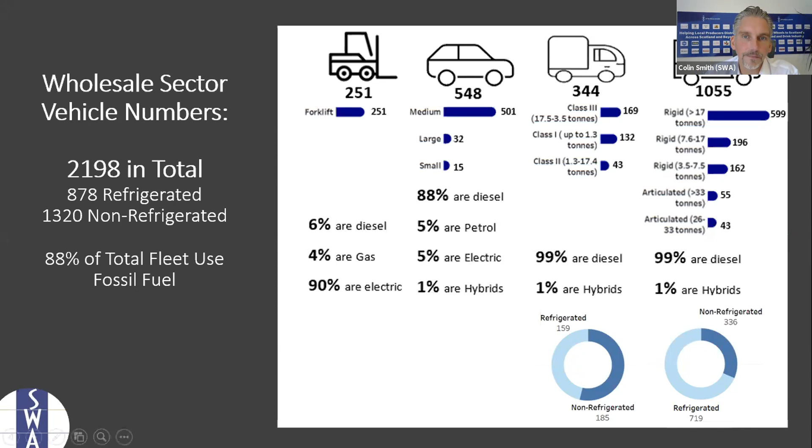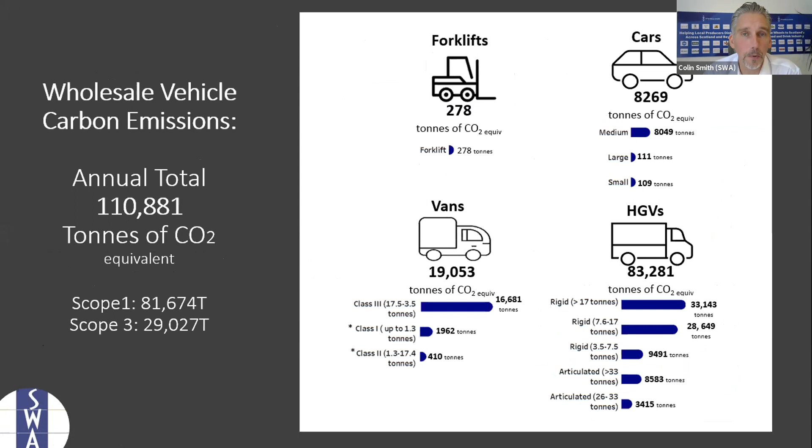If we now actually look at our carbon footprint, our sector emits the equivalent of nearly 111,000 tonnes of CO2 per year. For the techies, the figure is a combination of Scope 1 and Scope 3 emissions. For those that haven't asked how it's calculated, there will be more explanation in the report when it comes out. I think this graph highlights better the highest vehicle pollutants.

75% of all our emissions come from our HGVs, with the rigids alone making up 56% of all emissions. That can be seen in the first four bars on the left-hand side, where 3 of them are the rigids. Interesting that they make up 56%, but actually they only represent 36% of the total number in our fleet.

Meanwhile, a further 11% of our carbon footprint is from our articulated vehicles, which represented 9% of our HGVs, but actually only represented 4.5% of the total number in our fleet. Therefore, evidence suggests that they are the largest polluter by individual vehicle.

It's also interesting that only 7% of our emissions come from cars, despite them representing 25% of the total number of fleet. However, unlike cars, where 5% of our sector is already electric, there's currently no electric solutions for those larger vehicles. So it's clear that the biggest opportunity in decarbonising our industry is also our biggest challenge.

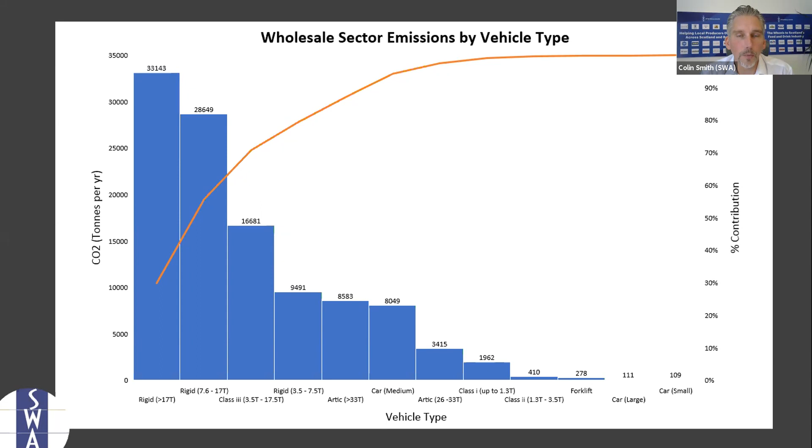And how do we decarbonise those large vehicles? When it comes to looking at a roadmap, please, this is provisional, this is not for sharing because we've not finalised this yet. When it looks at the roadmap to net zero, it is difficult to quantify because it is very much dependent on the development of new technology that we're here to talk about today, and the required infrastructure needed to support this.

Within our report, we have analysed and made recommendations on the different ways in which members can start to reduce their fleet emissions as of today and going forward as technology develops. These include increasing operational efficiencies, such as driver training and fuel management, through to looking at the pros and cons of potentially using transitional options such as HVO, LNG, or liquid gas, biogas, and dual fuel.

Making change today and moving to electric vehicles in our cars and smaller vehicles by 2030 could help the sector achieve a 15 to 20% reduction in emissions by that time. However, as HGV replacement and development timelines stand today, it's probably not likely that we'll achieve much more than a 36% reduction by 2035, and only thereafter will hydrogen and electric fuel cells have become much more commercially available.

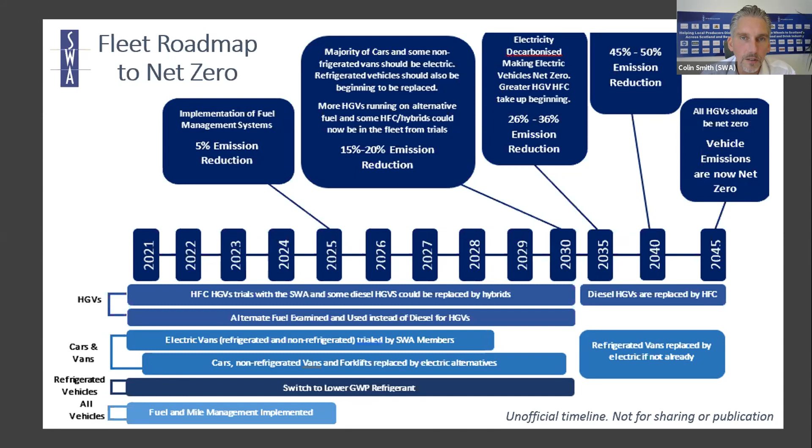But it's not just about looking at the technology development, it's also about looking at the barriers preventing people or businesses from the take-up, encouraging them and incentivizing them to adapt to those new technologies. So we did survey what the barriers were.

Of no surprise, cost and lack of financial support to incentivize change were cited as top barriers. It's no surprise, especially when our sector is working on 1.3% net margins, and that's something that we will always be telling governments and their agencies when we're speaking to them.

So this report that we've produced, along with the support of the people here today, will try and unlock those sort of financial incentives through Scottish Government and UK Government. There is huge investment currently going into hydrogen development, and we believe that unless incentives or subsidies are provided to those early adopters, change will not take place, and certainly not at the scale required to reach Scottish Government net zero targets by 2045.

So on that note, I'm actually going to pass now over to Barry Carruthers, and we'll start and see where change is happening and how you can get involved.

Thank you very much, Colin. It'll probably take me 16 minutes to get my slides to share, to be honest, but I'll give you a very quick rundown of what we're going to cover, because it will be quick from our side, because I suspect actually this is the boring bit, and that we hope to take care of all these issues behind the scenes. So if you want to switch off the next 10 minutes, this is the bit you want to miss, because actually Ben and Fiona and Amanda are going to do interesting bits later.

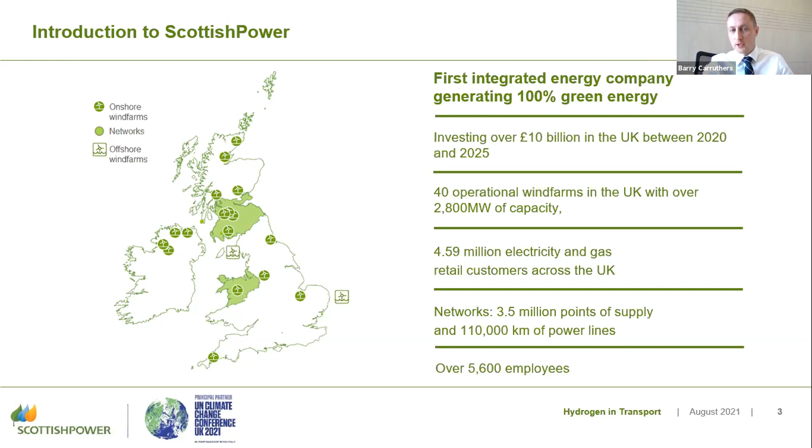And of course, there's areas of the country, as you see here, shaded in green, where we actually operate the network as well. Now, you'll hear us talk a lot about, obviously, Scottish Power, UK and Ireland, and certainly a Scottish focus. But for anyone that's thinking about international aspects, whenever you think Scottish Power, for us, Iberdrola is interchangeable with Scottish Power as a name, because even though we have lots of friends and colleagues based in Madrid, we're actually operating in all these different countries across the world, and actually a lot of them not on the map as well.

So it does open up things like port infrastructure. How do we get goods across the water, across ferries? That's something that we're doing in a joined up fashion as well.

Now, we made a strategic choice to really get into this last year, because hopefully it does make a lot of logical sense, actually, that if you're producing renewable electrons, we think that that will only get you 80 to 90% of decarbonisation. That extra 10, 20% of the economy really does need hydrogen to help. It needs a molecule rather than an electron. So that's why we know we have the right basis to build upon.

And a few example projects to flag up to you very quickly, but only to highlight this one in particular, south of Glasgow, because it's the first major one that we've put into planning, and therefore it's accelerated beyond other ones. So if you know the Whitelee wind farm, just south of Glasgow, it's 539 megawatts of wind power. So it's UK's largest and arguably Europe's largest.

There's always a wind farm in Romania that claims to be bigger, but I don't think anyone's gone round and counted the number of turbines. So we'll still claim that. But the point is, that's existing wind energy. We're looking to build new solar, and we're looking to put up to 20 megawatts of hydrogen production there.

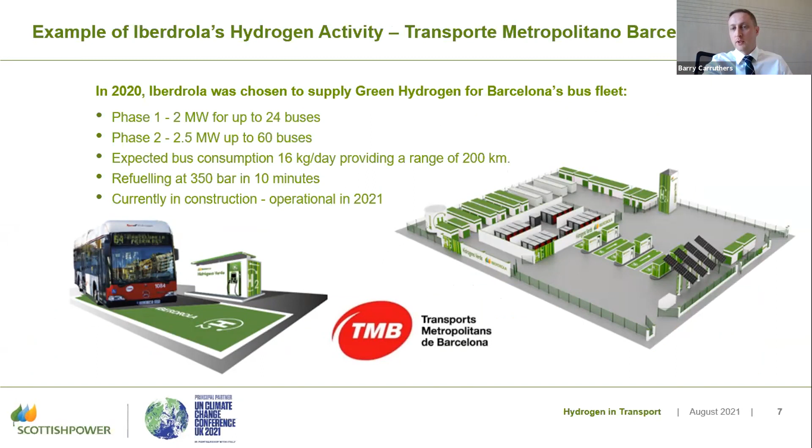Other things that we're doing across the group, and the same engineering team, I should say, we share all knowledge internally across Scottish Power, Iberdrola. We're doing bus refueling projects, for example, in Barcelona as well. So all these things are starting to really move at a pace across the different countries.

Now, I talked earlier about the 80, 90% electrification, and our CEO famously in the past said electrify the hell out of everything. Now that is true, and we stick by that. But for all the things that we know, at certain times you need a molecule.

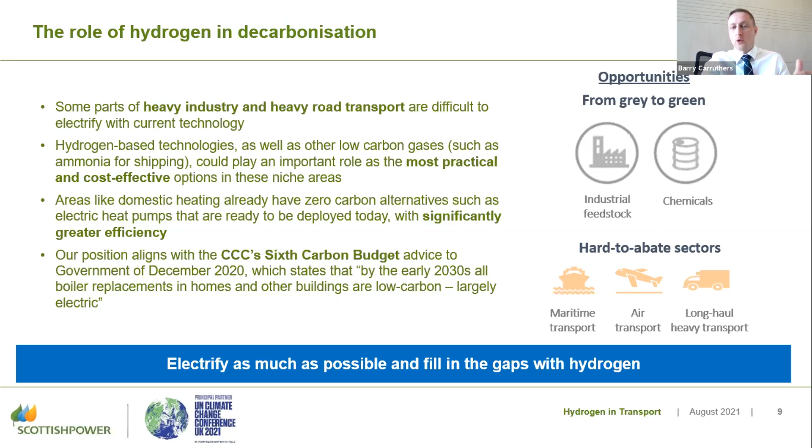Now, it feels like certainly the heavier end of road transport is where that plays out. Of course, trains, shipping, aviation, but also just industry, manufacturing, all the heavier end. Now, it's important that those things also exist, because the more we build out at scale for all these different companies and all these different customers, reduces everybody's costs. So it's a good thing that hydrogen has more uses, because then we get greater economies of scale. As I say, the unit price can come down.

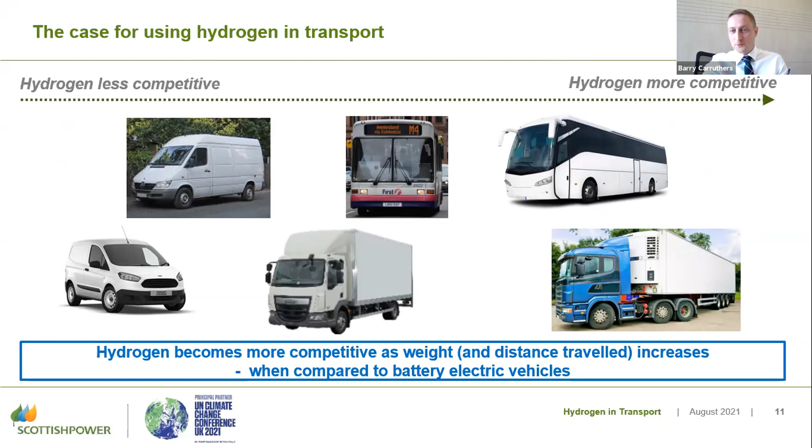At this point, I've got a colleague on the call, Andy Goodwin, our head of economics and markets. I'm going to pass to him in a minute about the really complicated stuff. I know you already know all this, and Ben and Amanda will cover it too, so we won't dwell on it. Andy, do you want to cover this section about total cost of ownership models?

Yeah, I can do briefly, Barry. The idea of the next couple of slides is to show there's a consensus view that the cost of using battery electric vehicles or fuel cell could be roughly the same, and that's what's shown in this study, both at 2020 and in 2050.

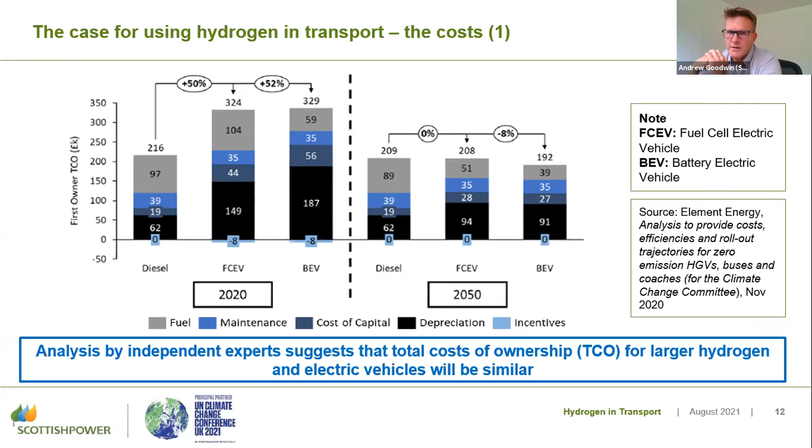On the next slide, Barry has got another similar study, a European study. Don't worry about the numbers too much, but the idea is just to show it's an equivalent overall cost of battery electric and hydrogen.

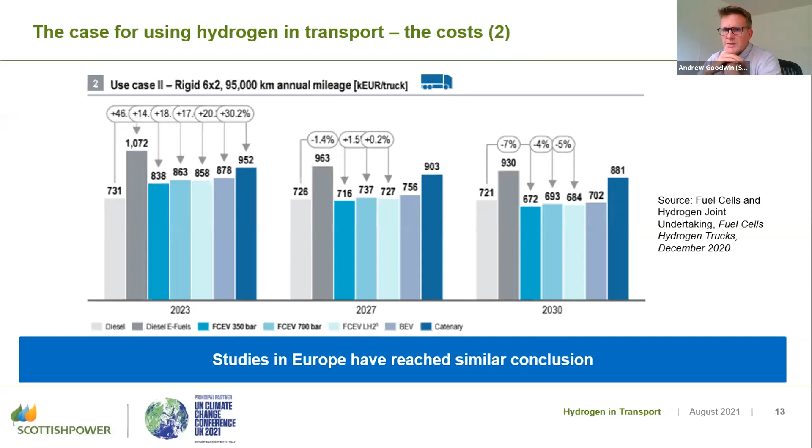So the idea then, on the next slide, people can look at those in their own time, but if the efficiency and the costs are similar, there are then practical benefits of using hydrogen which push it ahead of battery electric only.

In many ways, a lot of these relate to how similar it is to the model that many people have with diesel trucks at the moment. The range is similar, it's similar refueling times, and compared to battery electric, the vehicles are lighter. The site itself is also similar operationally - you don't need as much room for the refueling infrastructure as you would with battery electric charging infrastructure.

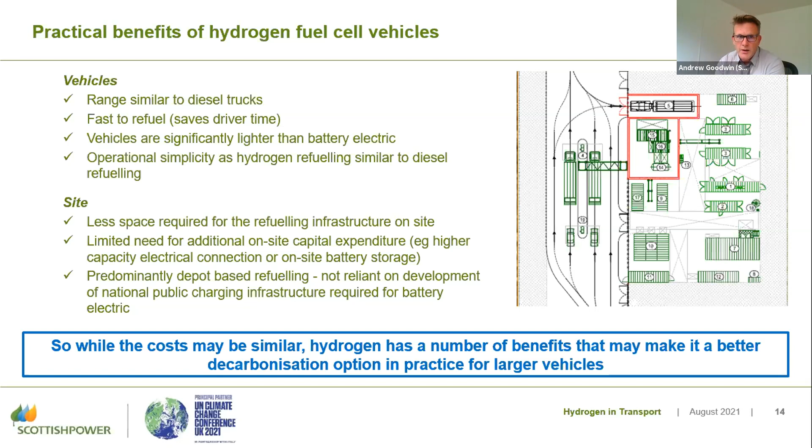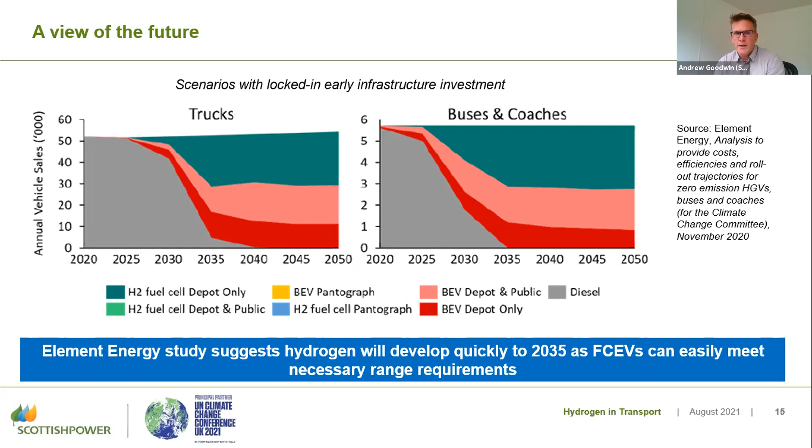This is a view of how Element Energy sees it going into the future in one particular scenario, so it's relatively balanced - you get battery electric and hydrogen, but in this case, particularly for hydrogen fuel cell at depots, it provides about 50% of the solution, if you like.

So, the economics. Before we get into that, these are our different options for how you configure hydrogen and how it relates to the customer. Option one is where you have the electrolyzer, the hydrogen production facility, on the same site as the customer or hydrogen refueling station, and you bring electricity in through the grid from the renewable asset - so this is all 100% renewable electricity driving the hydrogen production, but that's off-site.

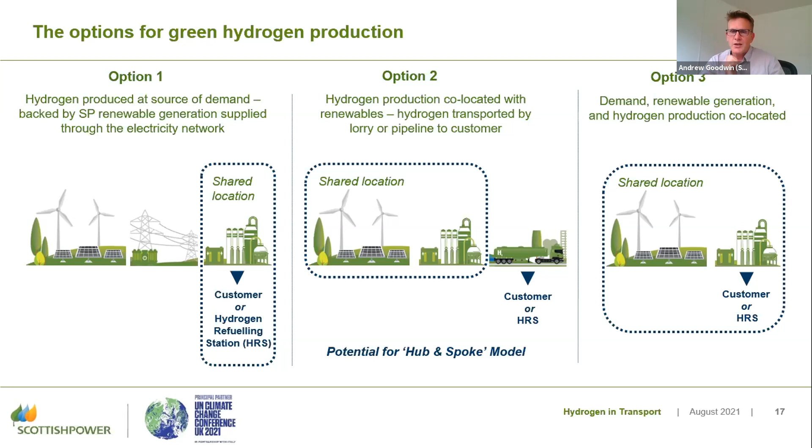Option two is where you have the electrolyzer co-located with the renewable electricity, and then you transport it - could be by tube trailer or pipeline - to the customer or refueling point. The third option is where all three are together: renewables, customer, and electrolyzer all on one site. In that case, you're cutting out all your transport costs and electricity distribution costs.

In terms of costs, on the right-hand side a Bloomberg study shows it could be €3 to €7 per kilo at the moment, with potential to go down to between €2 and €3 per kilo by 2030. The things really driving that down are renewable costs coming down - in the last 10 years, the cost of offshore wind, for example, has come down by more than half, and that will continue in the next 10 years and beyond.

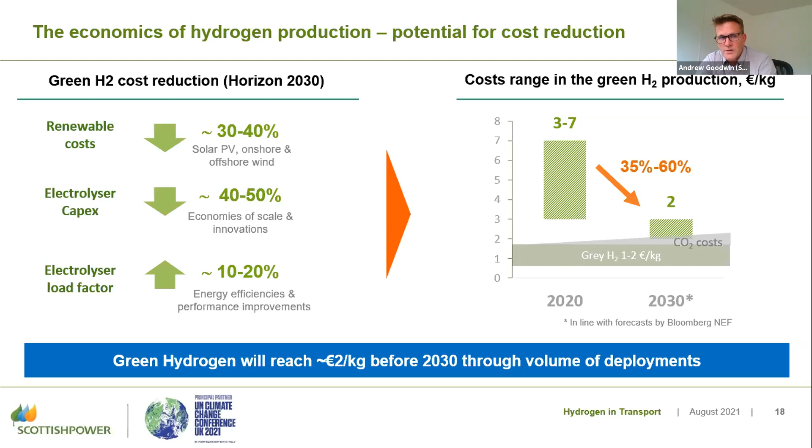That cost reduction will reduce the price of hydrogen. The electrolyzer capex, as more gets deployed, the cost will come down with technology innovations, and the efficiency of electrolyzers will also improve, further reducing costs. We see the cost of green hydrogen coming down to around €2 a kilo by around 2030 because of that volume of hydrogen production deployment.

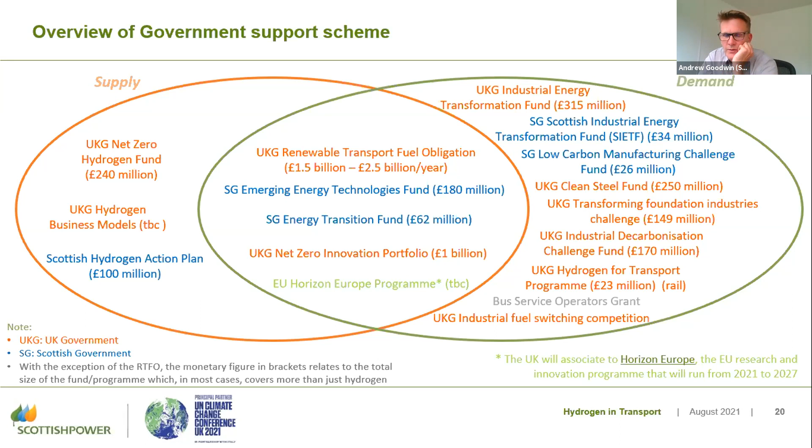If we move on from that, these I think are the key ones for the transport sector. So the biggest one I think is the Renewable Transport Fuel Obligation, which was started about 12-13 years ago, but was extended in 2018 to include hydrogen as an eligible renewable fuel.

Out of the others, so the Scottish government, the UK government, Net Zero Hydrogen Fund and the hydrogen business models, all of those three rows at the bottom are aimed at supporting hydrogen production. So just to take the Net Zero Hydrogen Fund, for example, that's a commitment of 240 million to 2025. The UK government is consulting on that at the moment, and that's really to provide an upfront capex payment to make hydrogen production cheaper. And that's one that we're particularly focused on at the moment.

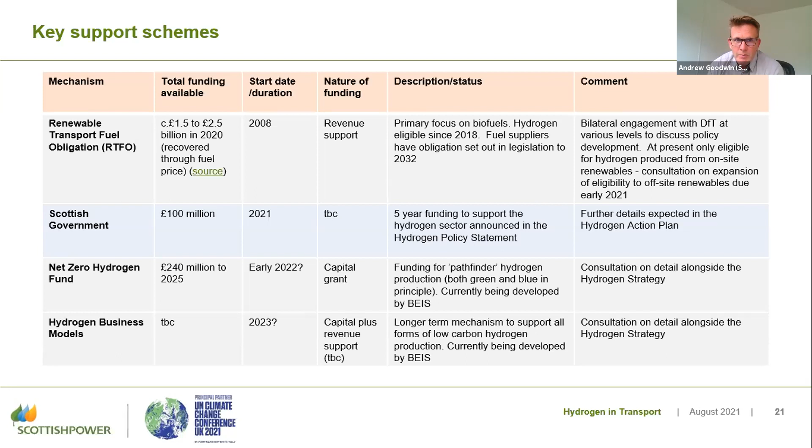But just to move on again, Barry, so the Renewable Transport Fuel Obligation, as I said, I think this is a really significant potential driver of moving to hydrogen. So very briefly, the RTFO is an obligation on fuel suppliers to supply a certain proportion of their fuel from renewable sources. So largely in the past, this has been around biofuels, but as I said, hydrogen was added as an eligible fuel in 2018.

And it actually gets double the reward of other forms of biofuel, for various reasons. When you're converting from a quantity to a kilogram of hydrogen, it means it gets 9 certificates, 9 RTFCs, Renewable Transport Fuel Certificates, for every kilogram that you produce, and that could give a value of around between £5 and £6 per kilo, which will bring down the cost of hydrogen to potentially around 3, which is at a level where we think it becomes competitive.

So with that, I'll hand back to you, Barry. Thanks, brilliant, thank you Andy.

And I guess on that previous slide, we've said nominally 60 pence against RTFCs. Now that's a variable, obviously, that could be much higher, could be 75, could be 80 pence, depends how you trade them over time. But to get the order of magnitude, it is worth about £5 to £6 per kilogram, and therefore it is really, really substantial to unlock some of these earlier projects.

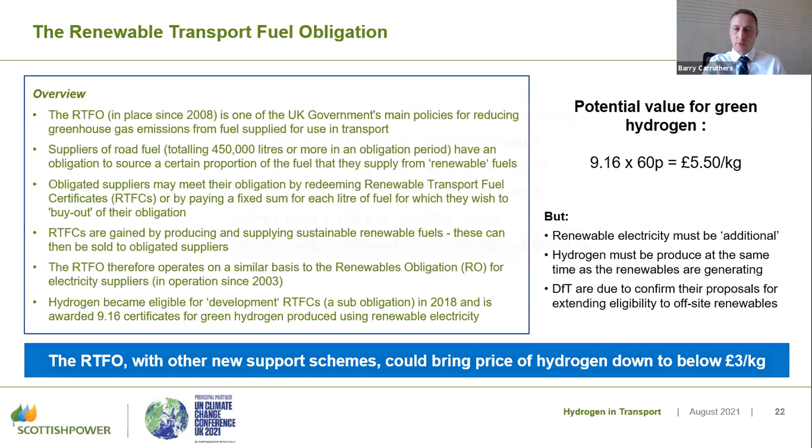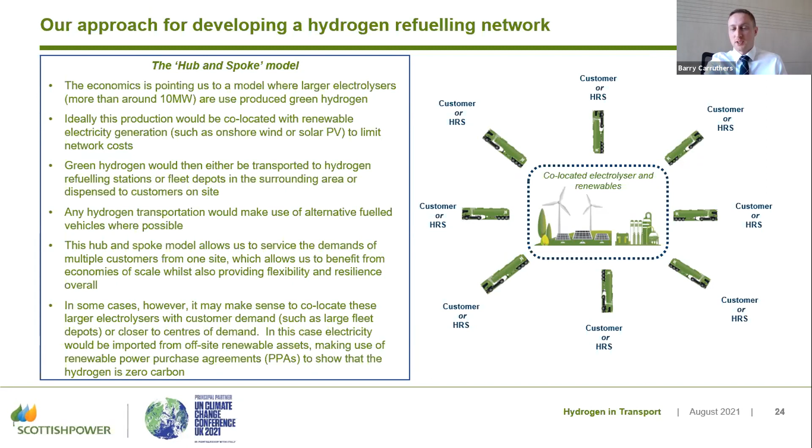And just to explain a wee bit what we mean about the kind of hub and spoke model that we've talked about - this is our job. Our job is to find out whether we should be making large volumes of hydrogen near a wind farm, near solar panels, at the top of a hill somewhere, and then using hydrogen driven tube trailers to deliver it to refueling sites. It's really hard to see large scale hydrogen production in an urban environment to refuel buses at a bus depot, for example. So we're going to have to try and make all these economics work for all of us.

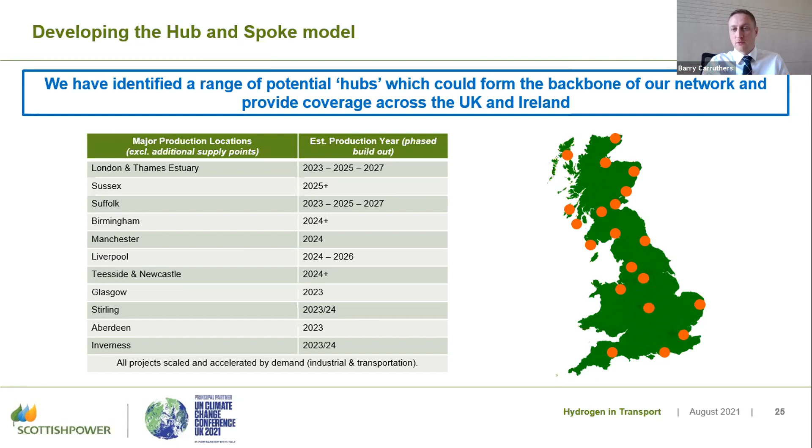But what we're trying to do is use that concept of hub and spoke to look at key strategic locations across UK and Ireland, both Northern and Republic of Ireland, so that we have things like port coverage, urban environments, major trunk roads. These are not the places that we would have refueling stations - those would be much smaller dots everywhere, but these would be big strategic centres of production, and that kind of brings the cost down, as Andy was explaining.

So really, for us, it's just an open offer to work with all of you, as we're already working with Amanda and Ben and Fiona, for example. I don't think any single player and any single stakeholder group can make this happen. It's going to have to be the whole ecosystem, and probably all the people on the call today, working together to figure out where is it needed, when is it needed, how much do you need, and try and bring a whole package together. And that's our kind of open invitation, to work collaboratively in that way.

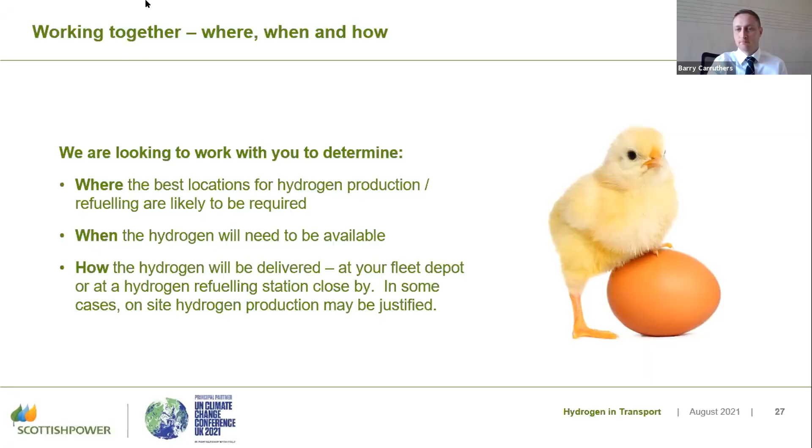Some people might be confused from the start of the first few slides, as I was slightly, as you were rushing through. But I guess all our members need to really know is what you want from them, what is it you need to know to enable the cost to come down, because that is a big issue.

One question I was going to ask, actually, because I know you're focusing at Whitelee, certainly it's all about green hydrogen production. UK government came out with their hydrogen strategy, and they were backing both horses, blue hydrogen and green hydrogen. What does that do for Whitelee and producers such as yourself, developing the hydrogen, where you really are focusing on green, but now potentially UK government certainly are backing blue as well?

I mean, great question. It's fairly logical, I think, where this has come from. As you can imagine, even when you think back to the days of the power sector and the evolution that's gone on, to see renewable technologies come to the fore and be incentivized, and now we would expect our electricity supply to be as clean as possible, as close to 100% renewable as possible, and that's the transition we're on as a country. So we shut down coal, we shut down gas, you reduce your reliance on fossil fuels, and you move to renewable technology. Now for us, in the hydrogen space, we're just going straight to that.

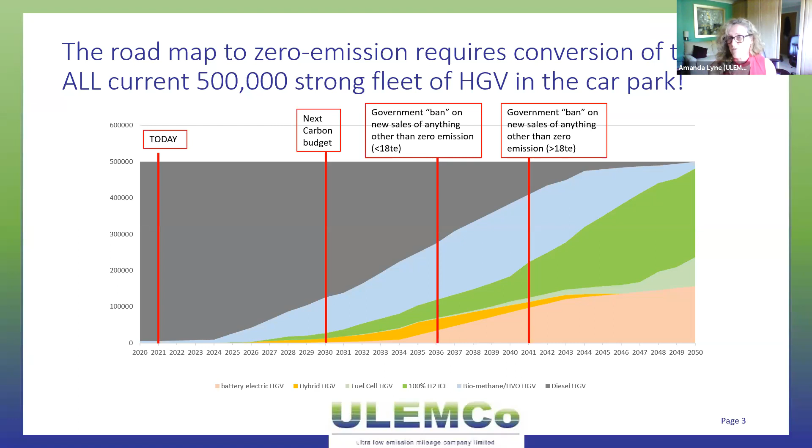What we need to do is provide demand for Barry to get on and make his investment. If you take the target we're talking about—and the slide in front of you is actually the UK figure, but Scotland has set a target to have 5 gigawatts of green hydrogen available by 2030—if you model how much hydrogen that actually means, it's in the order of about 400,000 tonnes. It could be a bit more or less depending on timing and productivity, the efficiency.

In any reckoning, by 2030, if all of that green hydrogen—remembering this is low hanging fruit, an area we know we can't decarbonise otherwise—would be between 15 to 20,000 vehicles. So if we deliver on the targets and what Barry is trying to do, we could use all of that green hydrogen into transport, 15 to 20,000 vehicles. We could add some buses into that too, but that's the opportunity for the investment Barry and Scottish Power are making.

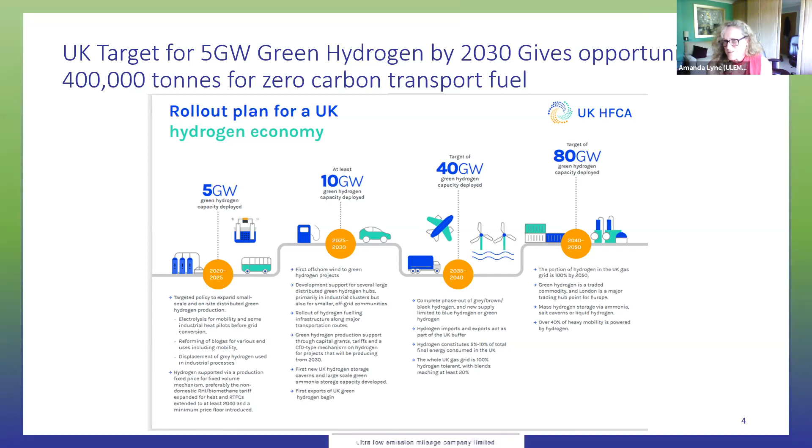I think, Colin, you said your members have about 2,000 vehicles, something like that. So in Scotland, we should have an ambition that all of that gigawatt goes to help us in decarbonising. That would accelerate your roadmap, Colin—accelerate getting more of those vehicles using hydrogen and decarbonising along the way. So there's a bit of an idea or vision of what might be possible.

So anyway, that's the scene. What is ULEMCo doing to try and help with that? Because we want to make sure hydrogen vehicles are available to customers to use, since we believe that in your sector, these are by far the best option for you to have normal operations, do your normal business.

We've heard from Barry, we can make a fuel competitively. We can give you a vehicle that mirrors mostly what you're used to doing with the diesel vehicle, so you won't have to radically change everything about your operation. So actually, that's what we're all trying to do—give you a vehicle that helps make that transition happen quicker.

In our portfolio at the moment, we have a technology that I'm going to talk to you a bit more about that enables you to do that even easier, where you can have your existing diesel vehicle—your existing decision making on Euro 6 purchased vehicles, new or existing—significantly reduce their carbon emissions and use some of Barry's hydrogen when he makes it available. For every kilogram of hydrogen you use, you'll be reducing your CO2 because it's green hydrogen in the process. That's our hydrogen dual fuel technology.

What that ultimately means is taking an existing vehicle and adding high pressure hydrogen tanks, similar to what would be on a fuel cell vehicle.

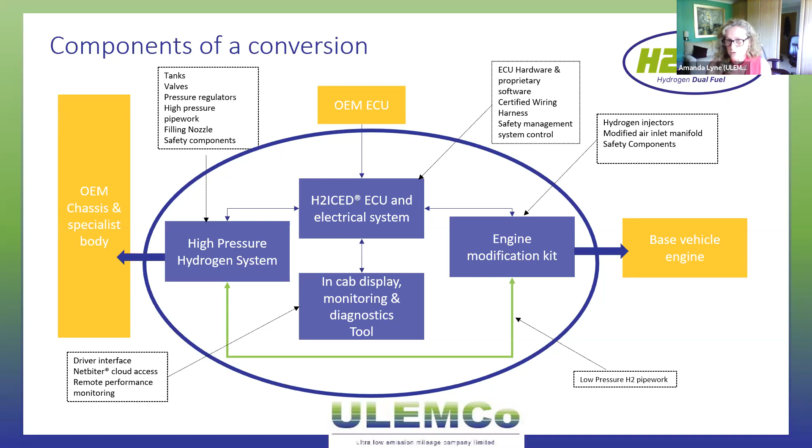If there's no hydrogen available, the vehicle will still operate as diesel, which is really important. As long as you use that bit of hydrogen, that's the proportion of CO2 you'll save, but you'll still be able to do the operation. Ultimately, you are able to carry on doing what you normally do, coping with the fact that we're building infrastructure to support that. We don't have it today, but we will have it sometime in the future, and it's growing.

We do other technologies. We do have available commercially today a fuel cell based technology that could provide range extension to electric vehicles, but the limit on the availability of electric vehicles is the limit on what we could do with the fuel cell technology. Longer term, we're also doing work on 100% zero emission versions, because the dual fuel technology always has a proportion of diesel in the mix, so it's not zero emission, but it does significantly reduce the emissions. We're doing R&D on 100% hydrogen combustion and future fuel cell technology integration as well.

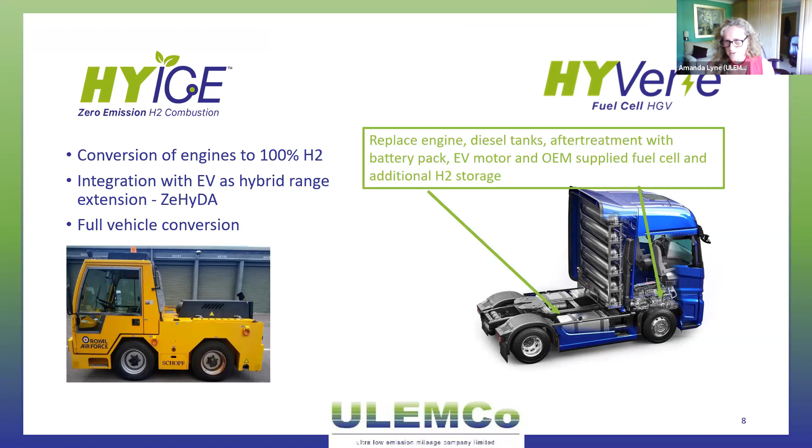So given all of that, why would somebody need to change, and why do they need to change now? As your own research has shown, Colin, the flip side of some of what are the barriers are also some of the reasons why you really need to get on and do this now.

Most importantly, if I buy a diesel vehicle today, I need to make an assumption about what its value is going to be at the end of life. Some people, 3 to 5 years, okay, they could probably accept that it's still going to be worth the same. But if you're going to own that vehicle for any longer than that, I wouldn't bet that my current assumptions on that asset value are the same as what they've historically been, because there's all sorts of alternatives that will come. What's the resale value of that vehicle? I don't know. You can't make the same assumptions. The world of the future shouldn't be made on assuming what we've historically had.

The reality is your customers, Colin, your members' customers, will be looking for lower carbon solutions. Another message about that accelerated target is the fact that large corporates and the people we're dealing with are not waiting for the government target, but are actually setting targets that are far further in front of what the political targets are. And that's a really good thing, it says we're embracing it. But the reality is, if we can offer a solution that's giving lower carbon than the guy next door to me, then there's a competitive advantage to doing that.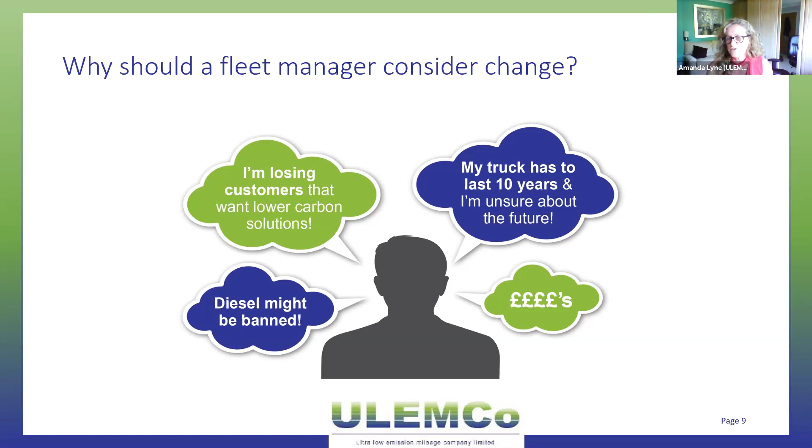Based on some work we've done with a number of our customers, if we could do a fleet-wide conversion of, I don't know, 100 urban trucks, your rigids, Colin, in your members' portfolio, converted to dual fuel using Barry's green hydrogen, would save 2,600 tons or so - I don't know the exact calculation - but a lot of CO2 in the here and now based on a reduction.

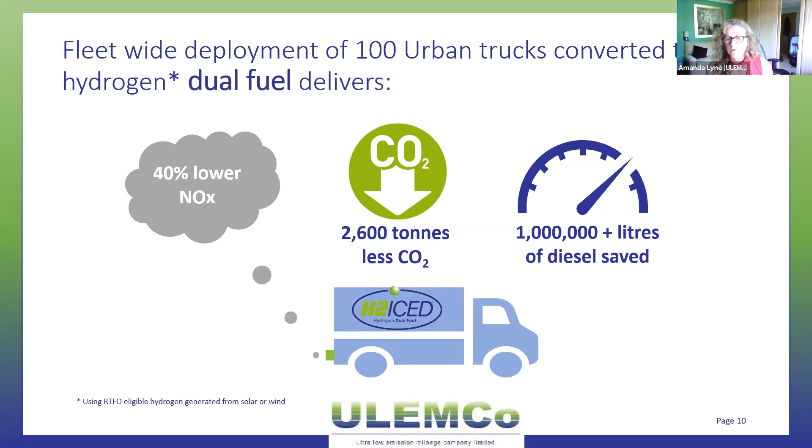The good thing is also, given the duty cycle of an urban truck, if we're putting dual fuel in, we also provide some air quality benefit as well. So we're assuming that you're fitting the technology to a modern Euro 6 diesel vehicle, because we want to make sure the air quality emissions are good too, but we can have the CO2 saving on top of that.

That just puts into context where we are today, not necessarily where we'll be in the future. But if we can do fleet-wide conversion now, using conventional technology available to us, that also helps build the infrastructure, and helps us get to the point where fuel cell vehicles are competitive, or 100% hydrogen vehicles will be competitive. We're also doing a really good thing as well.

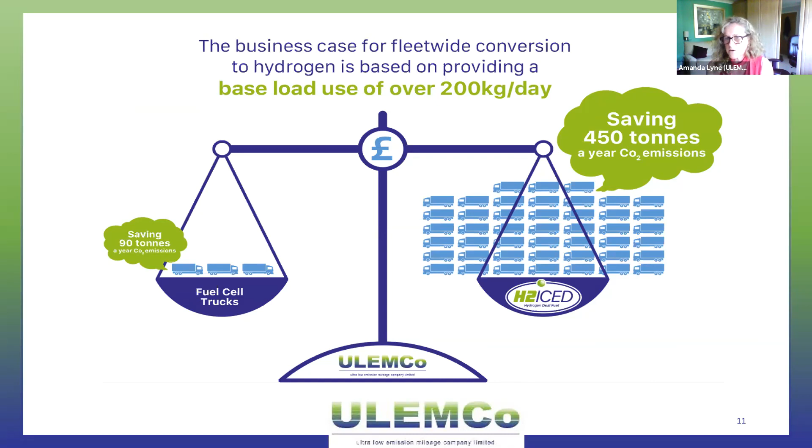We will save many hundreds of tons of CO2 by converting a vehicle today to run on hydrogen dual fuel, and that money is spent wisely, providing a better option for the moment, based on the fact that the alternatives - and actually that's true for electric too - are all more expensive. So we will be spending a little bit more money, we are adding some cost onto the vehicle, but we're getting all of that saving at the same time.

That's the message that lots of customers across the UK have been trialling, no distraction. The customers in Scotland, particularly around Aberdeen, where they've had hydrogen infrastructure for a long time, complement their bus portfolio with HGV fleets so that they can get the volume needed to be located in one place to make it all make sense.

Just to talk about some opportunity on the Artic, and I know that the Artic in this particular instance is less important for your members, Colin, because the greater proportion are in that rigid, but there are solutions where we can also reduce CO2 emissions using green hydrogen on Artics. Those will use 10 kilos a day on a 200-mile type round trip journey, and for every kilogram of hydrogen they're using, they're displacing diesel and not emitting CO2 into the atmosphere.

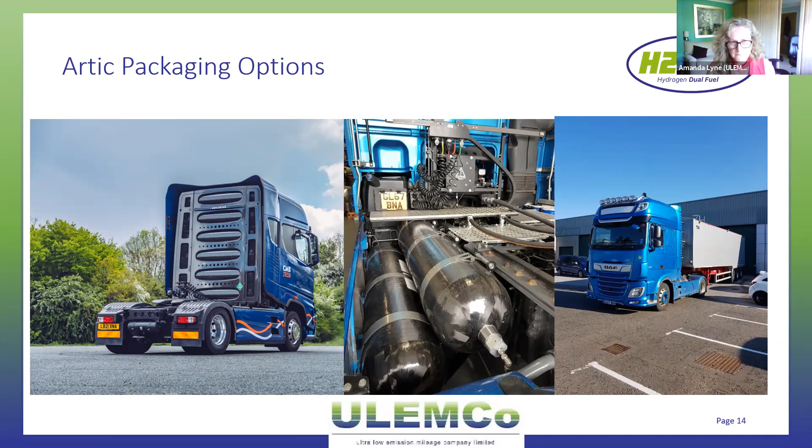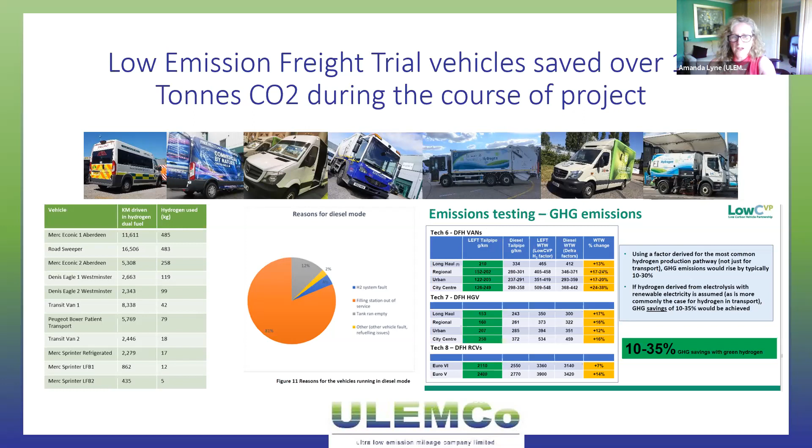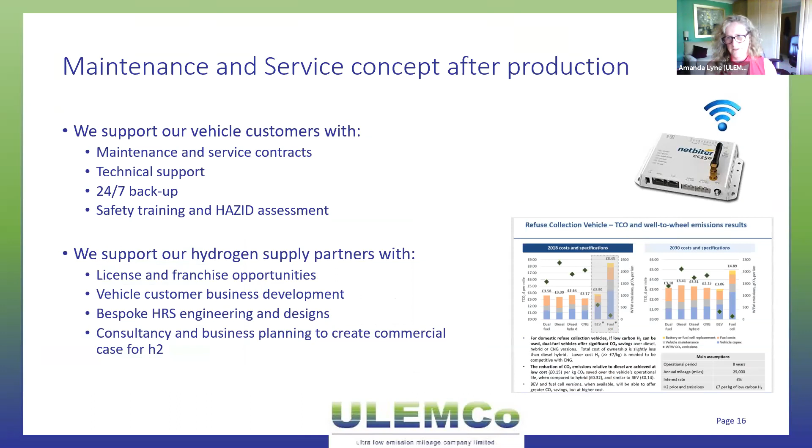Just to show, if your members, Colin, are interested, we can share real world data that shows what's possible with the range of types of vehicles we can do, from vans right through to Artics. And as a company, we're here and able to provide all the standard maintenance and services needed for the conventional vehicle. As it happens, the hydrogen system doesn't require any extra maintenance, but we can also help make sure that safety and all the other things are taken into account with practical experience.

Similarly, Barry quite rightly talks about us collaborating together, but every single hydrogen station in the UK has had some of our vehicles working out of it. So we have quite a lot of experience of what we need from a filling station, what we need from a hydrogen supply, what you need to do in a depot to make sure you have a safe setup and can meet the safety requirements, and we can help customers think through that process directly.

Basically, in summary, our focus and plan is to work with companies like Barry who are keen to create the demand, crack that chicken and egg part, and provide a solution that will enable locations using between 300 and 500 kilos a day. In our case, on an Artic, that would be about 30 Artics based around a location providing a base load.

A refuse truck probably only uses 5 kilos a day. Your rigids delivering more locally would probably be similar to that, Colin—using anywhere between 5 and 10 kilos a day, depending on the mileage. So that sets the context for the kind of number of vehicles you'll want around a location to make a sensible, usable business model.

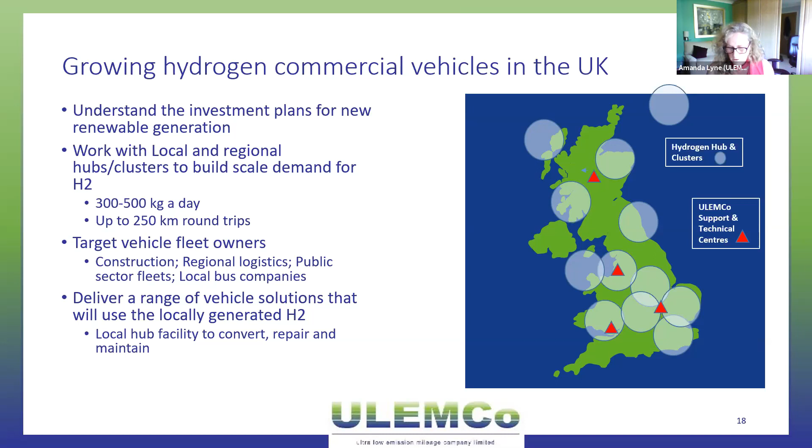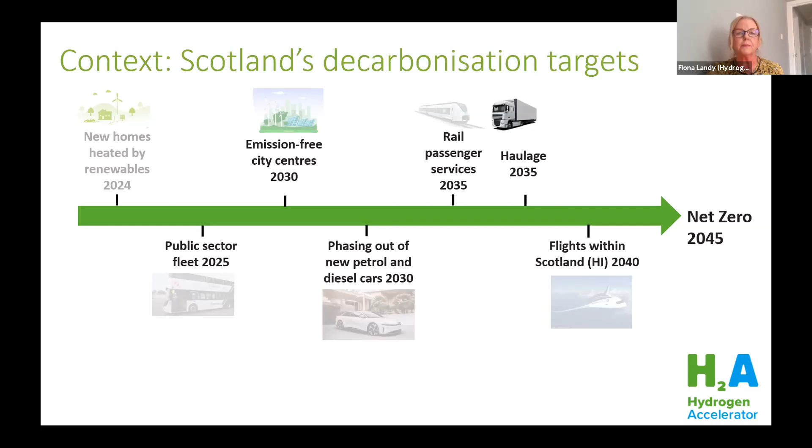With the refuelling infrastructure, we've done a lot of novel projects in the past which has served us really well, and we've got lessons learned from those, but now it really is that scaling up opportunity. There's one thing about the hydrogen sector - it's all about collaboration. This is a snapshot of a few of the projects.

My background - I've been in the sector for 11 years. I'm from Aberdeen City Council originally, and then I moved to Scottish Cities Alliance, where I led on a programme, a European programme, which was about kickstarting the hydrogen economy across 7 cities. This was about commercialisation of hydrogen fuel cell buses and also the hydrogen refuelling infrastructure.

So 2 cities went forward at the time, Dundee and Aberdeen. Aberdeen has deployed 15 double-deck buses, and we're putting in another 10, and Dundee will be deploying 12 buses in the next year or so.

The actual refuelling infrastructure will be placed at Michelin Scotland Innovation Park, which was the Michelin tyre factory, which many of you will know was decommissioned about 1.5 years ago. It's now positioned as the centre for sustainable mobility for Scotland, again trying to retain those jobs and bring about that innovation. So us in St Andrews work very closely with MSIP about bringing together a skills academy there as well, and really bringing all that manufacturing together.

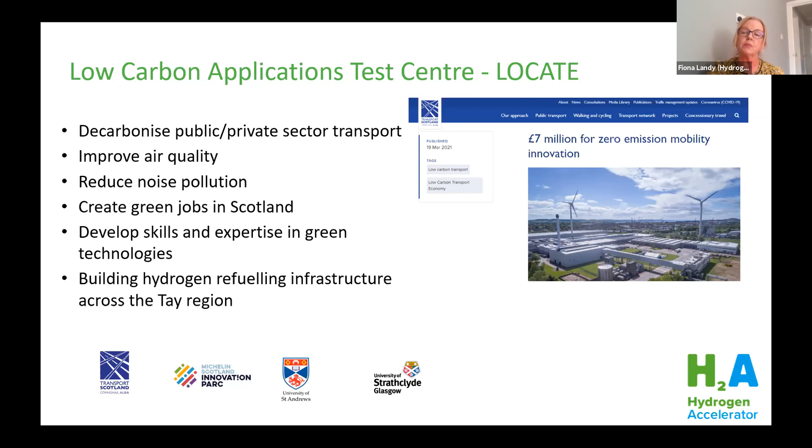I'll let Ben speak in a minute about all those green jobs that we are trying to set up at this particular facility. Part of that facility is about having a powertrain test centre set up there for all the innovative technologies of the future.

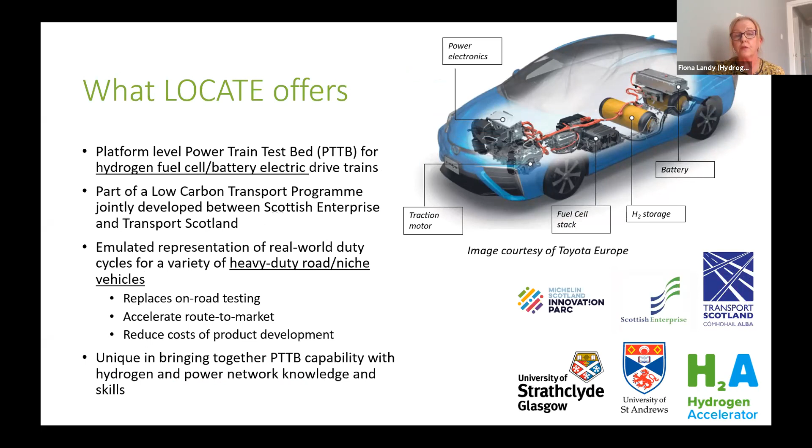So it's off-road testing for powertrains. We were awarded 7 million from the Scottish Government to set that facility up, working with Strathclyde as a partner and MSIP in bringing that programme together, which will come into fruition in the first quarter of 2023.

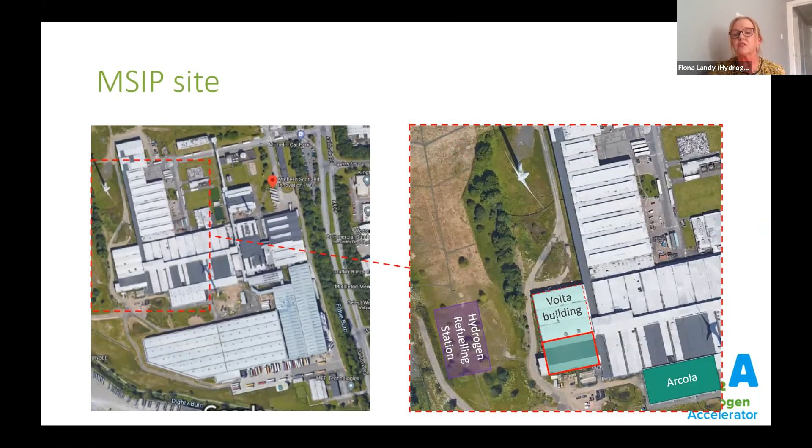I continue to work with all the 7 cities, and I've been supporting Glasgow with their fleet strategy and decarbonisation over the next 10 years, which they want to reduce to 5 years. So very much around looking at their heavy fleet vehicles, which they've put the stake in the ground that they want to all be fuel cell electric.

We raised some funding through Transport Scotland for a prototype refuse collection vehicle that Arcola Energy, in partnership with Farid Hillend, produced, which they'll have demonstrated at COP, and that's led on to another fleet. I'll let Ben talk more about that, and again, as Amanda said, around the dual fuel gritters as well. So it's a really effective way of making that step change into heavy fleet vehicles and really driving forward the decarbonisation of Glasgow, which is a very big captive fleet to decarbonise.

So they're completely changing the way they use their vehicles - they're double shifting now, moving into the fuel cell department. So the potential for having hydrogen refueling infrastructure - the tender process is out at the moment.

This is the Polmadie site, the big GREC energy-from-waste plant in Glasgow. That surrounds a number of organisations such as Transport Scotland Roads, First Bus just down the road, and also Alstom. So this is all about clustering - really looking at where you position that hydrogen refueling infrastructure to maximise the opportunities for what public and private sector organisations are located in that region, to really maximise the scale and get the economics to stack up.

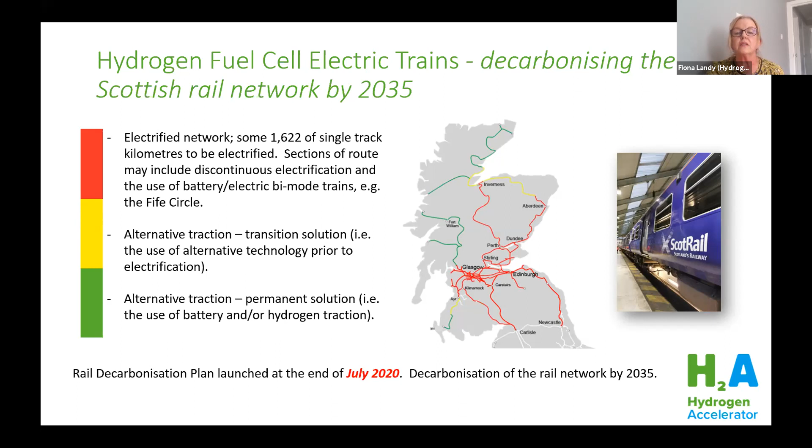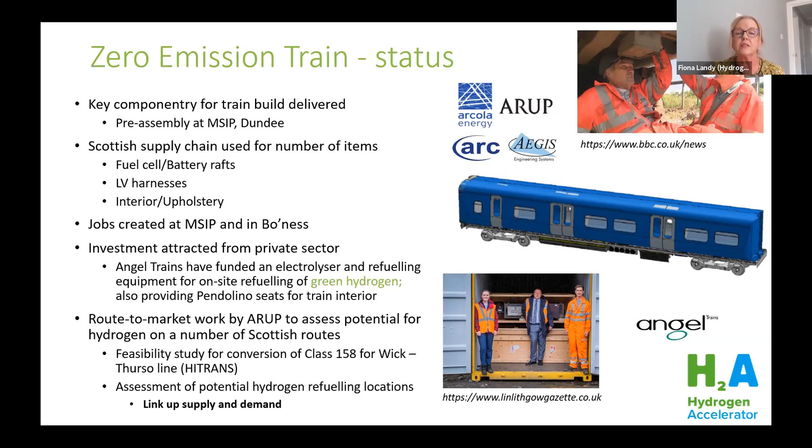So really looking right across the sector coupling of different transport modes, we can come together to start that decarbonisation programme. The St Andrews Hydrogen Accelerator led on this project - we procured this train, a redundant train for ScotRail, and Arcola Energy in partnership with Arup, Arc, and Aegis, and thanks to Angel as well, provided funding for temporary fuel infrastructure. They're converting this class 314 train, which will be demonstrated at COP26 this year. That's Minister Dey there, who's been to the site and is really impressed with the train, and very excited about the opportunity for decarbonisation of the train sector in Scotland.

And I'll just finish here on the SHIFT programme. The Hydrogen Accelerator is really excited about supporting this programme, looking right across different sectors such as timber, food and drink, and utilities, to really start to support another sector making that transition into the hydrogen and fuel cell technology sector. Now I'll hand over to Ben to continue on about the technologies. Thank you.

Hopefully I just managed to successfully wrestle control of the presentation. I think you got it. Can I move? See if I can. Yes, I can move the presentation.

Afternoon, folks. I'm Ben Todd, CEO of Arcola Energy. I'm going to talk about fuel cells and hydrogen vehicles, give you a bit of technology overview of hydrogen fuel cell options, and then talk about the SHIFT project. There's some quite dense slides at the end on SHIFT that are intended for sharing later, so the deck will be available, and you can all read about how to engage in SHIFT.

So start off then. I get the deck to move. Yeah, okay.

So, Arcola Energy. We're a leading UK specialist in hydrogen and fuel cell integration, focused on zero emission heavy duty vehicles. We've built and integrated fuel cells in everything from 1 watt toys up to designs for multi-megawatt power generation systems. But really the focus at the moment is all about heavy vehicles, not the small passenger vehicles. We leave that to the likes of Toyota and Hyundai and the other mainstream vehicle OEMs that dallied in hydrogen 10, 15 years ago and are now coming back in again. We focus on the heavy stuff.

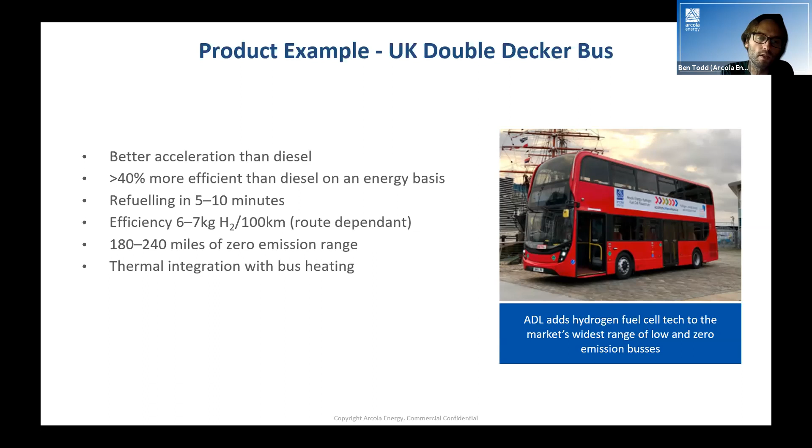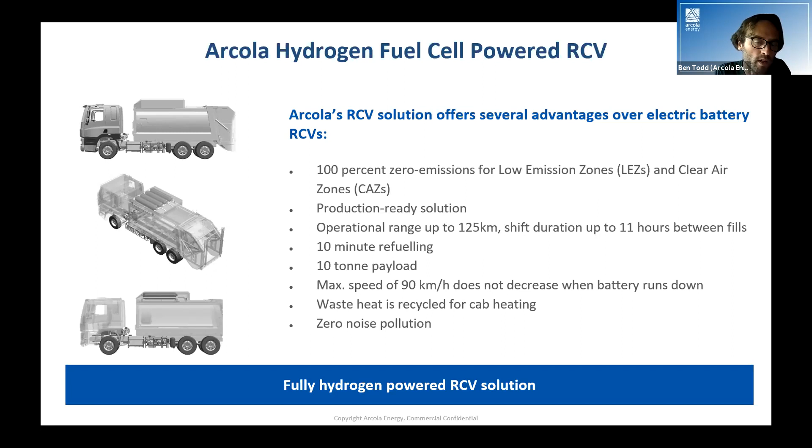Also of importance for the refuse collection vehicle, I guess for extra urban deliveries, is that you can get up to full speed and you don't have that challenge where the speed capacity runs down. So you take an electric vehicle onto the motorway and you start to get really anxious because you're slowing down and you're not sure when you're going to fall off that cliff of battery availability. Low noise and waste heat recycling for the cab are the other benefits.

So if we say that, let's take those as two existing vehicle classes. Let's just drill down a little bit into some tech. So really quick summary then of the benefits.

So really why fuel cells are interesting is these two things. It's that it is true zero emission, and it's the same performance as an electric vehicle because it is an electric vehicle. So people will often talk about, oh, a battery's good or hydrogen's good. The answer is they're both good.

And there's very few hydrogen vehicles that don't have a battery in. The battery is about 1/10 of the size of a conventional battery-only vehicle, and it's a far safer chemistry than you would usually use. So the risk of a battery fire on a hydrogen vehicle is very, very much lower because we typically use a lithium titanate, so it's the safest of the lithium chemistries available.

But it is fundamentally an electric vehicle, and the reason that fuel cell vehicles are coming to the fore or are becoming more practical and more cost-effective is because of all the great work that's been done on battery electric vehicles. But yeah, like battery, so there's no NOx, no emissions, no particulates, no CO2, no hydrocarbons, no smell, and essentially no noise, limited noise.

Obviously you've got tire noise and you've got various horns and blowers. And on the other side of it, the bit that you'd normally compromise on a battery vehicle is, of course, that full operability. Some of the stuff that Barry talked about of, do you fill at the depot? Do you fill from centralized stations? Those considerations are essentially the same.

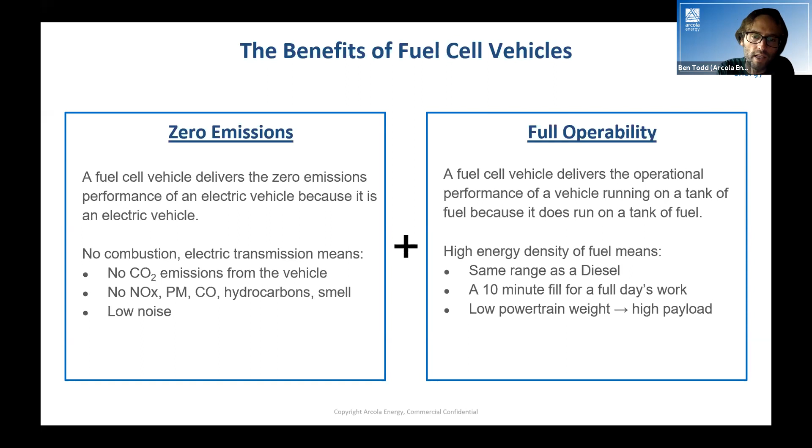Now, hydrogen filling station in a depot is a bigger commitment than a diesel tank. But as the technology evolves, as the regulations get better understood, it does become quite viable to put a hydrogen filling station in a depot if you've got a good fleet there, and it can become quite cost effective and practical. So a little bit then, I think Amanda touched on some of this as well, just sort of clarity really on the different types of hydrogen fueled vehicles. I think it's probably useful.

So we said number one is a kind of what I would call a kind of pure fuel cell vehicle. When I say pure, it is still a hybrid, it's still got battery in, but the dominant source of energy is the fuel cell and the dominant source of power. So when you're driving, you're basically running on the fuel cell. The battery is just buffering and giving a bit of support. The battery is almost acting like a flywheel.

So it's driven by electric. You get most of the power for the electric motor from the fuel cell. The battery, one of the things the battery is really important for is that regen. So whether you're doing a takeoff on a hill, the battery will kick in, but equally when you slam the anchors on, the battery will kick in and soak up that energy.

With a full fuel cell vehicle, there's no need to plug in. You never need to plug in. And we think that's probably best suited to heavy duty and long haul.

A range extended battery electric vehicle is in a sense very similar to the fuel cell vehicle, but the sizing has been flipped. So instead of having a large fuel cell and a small battery, on a range extender, you have a large battery and a small fuel cell.

So we've been putting, there's a Renault Kangoo vehicle that was developed a few years ago. So it's the Renault Kangoo EV, it's a tiny little van with a small fuel cell added as a range extender. So it takes away some of that range anxiety with the battery, consumes a bit of hydrogen, so you get some benefits. We tend not to do this because what you end up with is a kind of oversized battery.

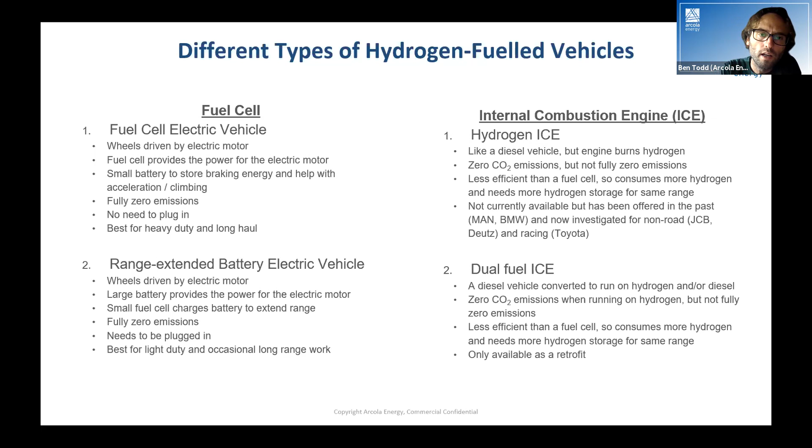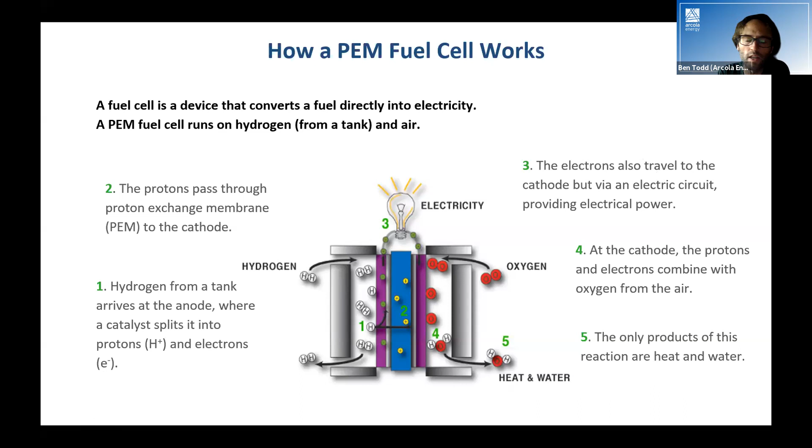I won't spend too much time on this, but just this understanding that the fuel cell is an electrochemical device. Just like a battery is an electrochemical device - in a battery you have all the chemistry inside, and you effectively just shift the state of that chemistry to make electricity. In a fuel cell, it's exactly the same as the battery, except that all of the stuff isn't stored inside. You've got hydrogen in an external tank, and you've got oxygen in the air. So it's fundamentally different from a combustion engine - nothing goes bang, nothing goes pop, there's no vibration, none of that noise.

It's straight, just like a battery would work. So what goes into a fuel cell electric powertrain? This may be useful as people start to have those conversations with potential suppliers and the like, to understand what people are talking about.

So if we start from the bottom in blue, like any electric vehicle, you've got electric motors, and typically those motors are going to be AC machines with inverters. So that's come straight off the electric vehicle. The Toyota Prius has done more for the progression of fuel cell vehicles than a lot of other things - Prius was a petrol hybrid, but all of that development of the motors, the inverters.

We then have a whole load of high voltage power distribution. So again, like a battery electric vehicle, moving that high voltage around so you can drive air compressors, air conditioning - the various ancillary systems all have to be electrified. Loads of work's been done on that, and we're getting to the point of having volume manufacture of really reliable elements. This is the stuff that used to cause trouble on hydrogen vehicles - it'd be these small ancillaries that would break because they're made in small volume.

If we jump to the right, then you've got the battery. In a battery electric vehicle, you've just got a big battery, and all of this stuff stays the same. You've obviously then got your various low voltage systems. If you ignored the hydrogen tank, fuel cell, and that fuel cell DC-DC, that's a battery electric vehicle. So for the fuel cell, we downsize the battery - very substantial, probably 90% downsizing - and we replace the battery with a fuel cell and with hydrogen storage. So there's the elements in your vehicle. But I think it's really important for people to have that sense: this is an electric vehicle that happens to store a load of its energy in hydrogen rather than a really big battery.

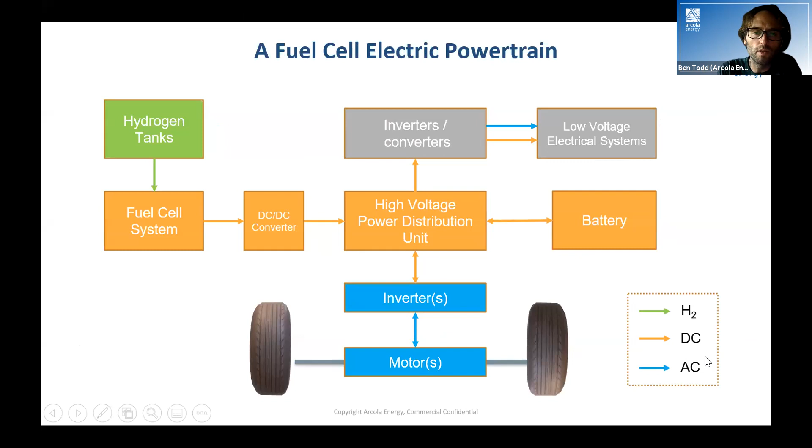This is what we spent the last 12 years developing. It's a platform approach, which involves all the things you would expect. So the fuel cell engine - we work very closely with Ballard Power Systems, been around for 40 years, probably the world leader in fuel cell engines.

We then work with a high power battery, as I touched on - this is not the same battery chemistry you see in battery-only vehicles. This is a high power, almost like a supercapacitor, and it's a really safe, resilient chemistry. We expect to get 14 years life out of the battery. Those of you that have spoken to people about the early hybrids, where the batteries died after 3, 4, 5, 6 years, people were stuck with vehicles with dead battery packs - basically, people put the wrong chemistry in and misled the market. So the batteries we use, we really do expect to do the 14 years.

That comes down to packaging constraints and safety constraints. If you undersling the tanks, you've got to be careful about cornering and impact from below. If you put them on the roof, you're thinking about height and center of gravity. If you put them behind the cab, you're thinking about how much you push the load backwards and what that does to dynamics. So there's quite a lot of work that goes into deciding where you want to put your tanks.

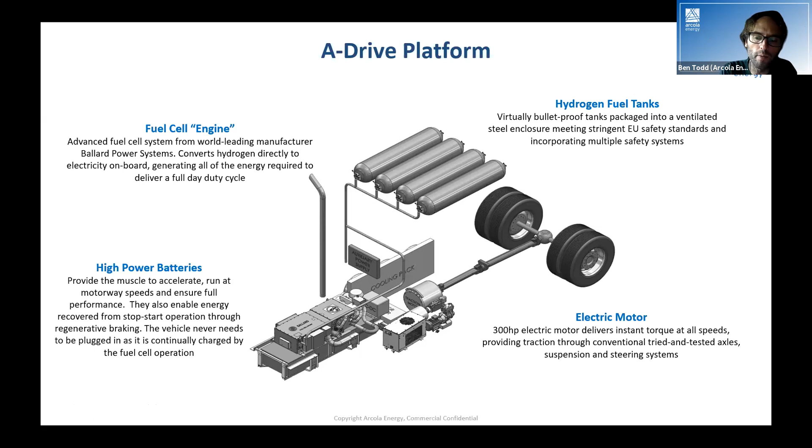I think we'll cover this quickly, maybe more for summary for you to read later. It's about zero emission, and we really focus on the heavier vehicle. Very crudely, if you can do it with petrol, you might think about battery. If you have to run on diesel, you should be thinking about fuel cell and hydrogen. It's a crude cutoff, but not a million miles away. What's useful about it is it gets away from this 'VHS Betamax' argument - it's not that, it's a petrol diesel argument, so it's not really an argument. It's just choosing horses for courses.

Battery versus hydrogen, real focus on heavy duty. In terms of that chicken and egg challenge, if we can do back-to-base fleets, which are heavy vehicles, that means you've got a heavy demand of hydrogen that's well understood. We don't need lots of filling stations everywhere because we always know where the fleet is. That's where you can make a business case and drive much more quickly. It's why we're interested in talking to you guys.

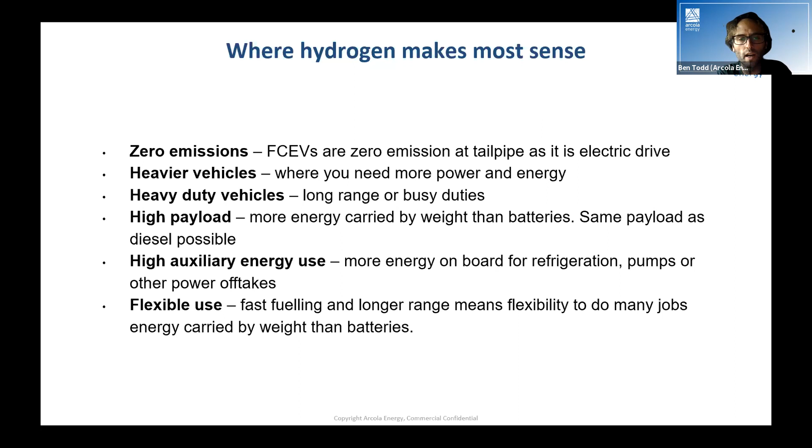Benefit of hydrogen is again that high payload - at some point it's just diminishing returns as you add more and more batteries. The other area, which I touched on with air conditioning - we're doing some work in Asia, and a lot of companies saying 'buy this battery electric vehicle, it'd be brilliant,' then they'd run it and it'd be rubbish. Why? Because you've got a massive air conditioning load. So this auxiliary energy use, refrigeration, or a PTO for some other application - this is where the benefit of hydrogen really kicks in, because you can store that extra energy to do traction and auxiliary ancillary, plus the flexible use and quick refuel.

So the SHyFT project then, super fast now. It's a Department for Transport project, 20 million investment, and they basically want to do fleet trials. What we've got at the moment, we're in the feasibility phase. There's a whole load of money being put out to investigate electric road systems - I'm sure you'll have strong views on those - catenary wires down the motorway, hydrogen fuel cell vehicles, of which SHyFT is one of the funded projects, and a load of work on supply chain development. So SHyFT is the project we specifically want to talk to you about here.

It's about ambitious feasibility studies. This is an opportunity to really quite seriously look - this is a big challenge, as has been talked about already. You can't piss about at the edges. We need to think about what it would take to shift a significant proportion of the fleet, and fast.

The consortium members, you can see there - we've got a great consortium together. Arcola Energy doing the fuel cell piece, we're bringing in the likes of Scottish Power to manage the chicken and egg, the likes of Arup who can do that kind of big energy system view - how's it all joined together - and obviously folks like we're speaking to today, who are the end user. What do you guys actually want? What are the problem points? Where does it make sense?

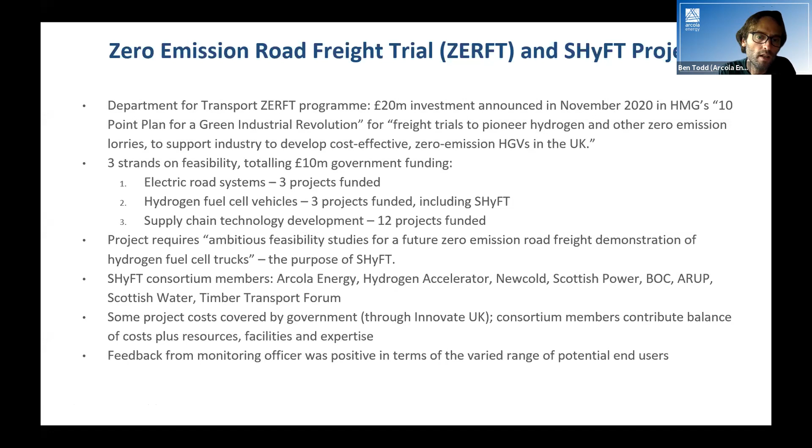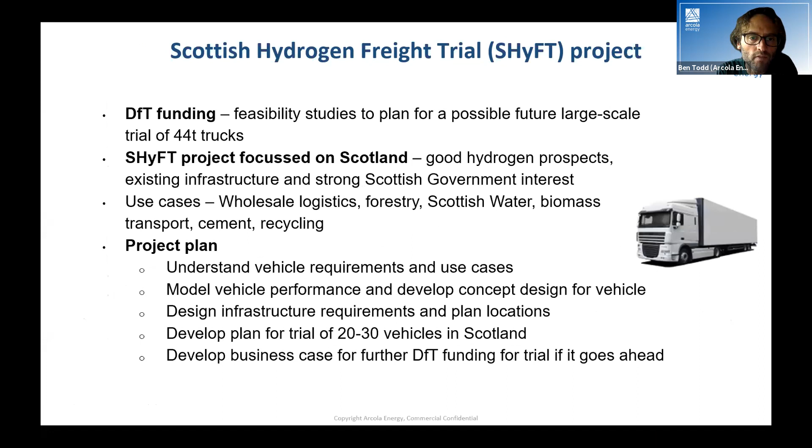So effectively, there it is - off we go, there's a project running now. Lee and Fiona on the call are both gathering information from you. We'd like you to reach out, speak to us. Have you got an interest going forward? 44 ton is the headline, but rigids really is a much quicker thing to move on, so we're happy to talk about that as well.

In return for being part of the study, if you give us a load of duty cycle requirements, we'll model them up and come back and tell you what we think might work. Our interest as a company is seeing good stuff happen, so if you give us a duty cycle and batteries work brilliantly, we'll tell you that. We'll do some proper analysis and share the results back to you. So there you go, that was hopefully useful - happy to take any questions.